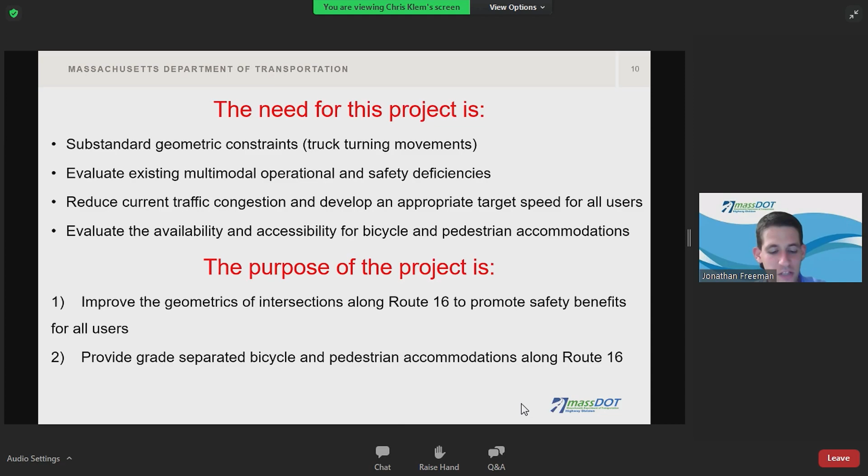This graphic shows an aerial view of the project limits outlined in red. The project limits start on Uxbridge Road, Route 16 in Mendon, just west of Taft Avenue, and continue east for 1.9 miles on Route 16 to the Hopedale town line, just east of Harrington Street.

In addition to the corridor, the following intersections and their roadway approaches are included in the project and are highlighted in orange: Route 16 and Hartford Avenue West, Route 16 and Millville Street, Route 16 and Emerson Street, Washington Street, Route 16 and Maple Street, and Route 16 and Main Street, North Avenue.

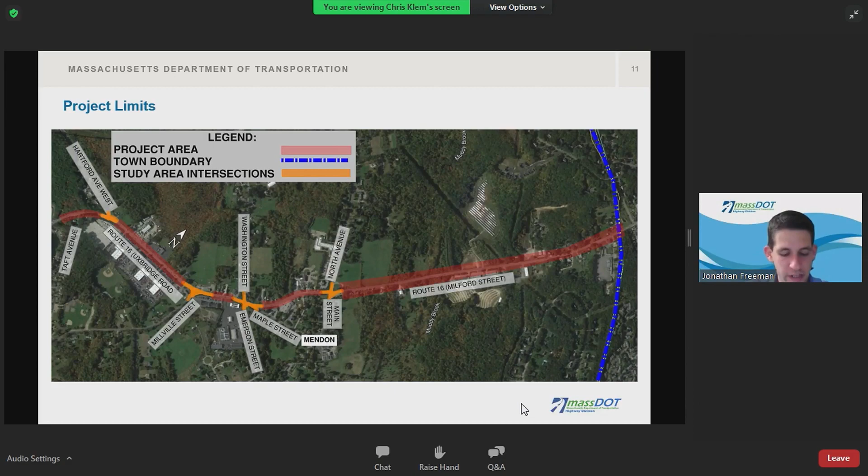Existing deficiencies along Route 16 and at the existing intersections include traffic congestion, poor and unsafe operations, and a crash rate higher than the statewide average.

In addition, existing deficiencies were also observed along the corridor, including, but not limited to, a lack of consistent pedestrian and bicycle accommodations, poor pavement conditions, unconnected sidewalks, and drainage issues. The next few slides will show existing conditions, photos of these deficiencies and others.

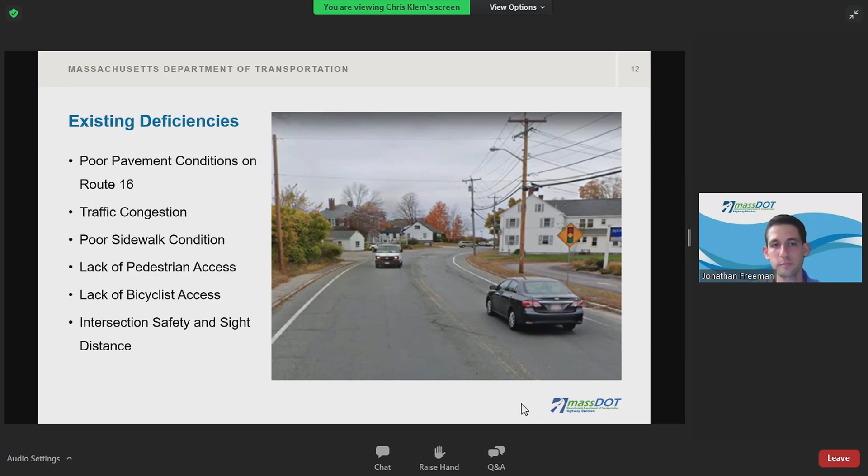Some of the deficiencies in this photo include pavement in poor condition, no bicycle accommodation, and non-compliant Americans with Disabilities Act sidewalks. Outdated signage does not provide proper retroreflectivity and advanced warning needed.

The lack of accommodations for all users throughout the corridor is seen in these photos. Due to the numerous driveways, both residential and commercial, improving access management to and from Route 16 was evaluated to improve safety for all users. This project will make the needed improvements to these existing deficiencies.

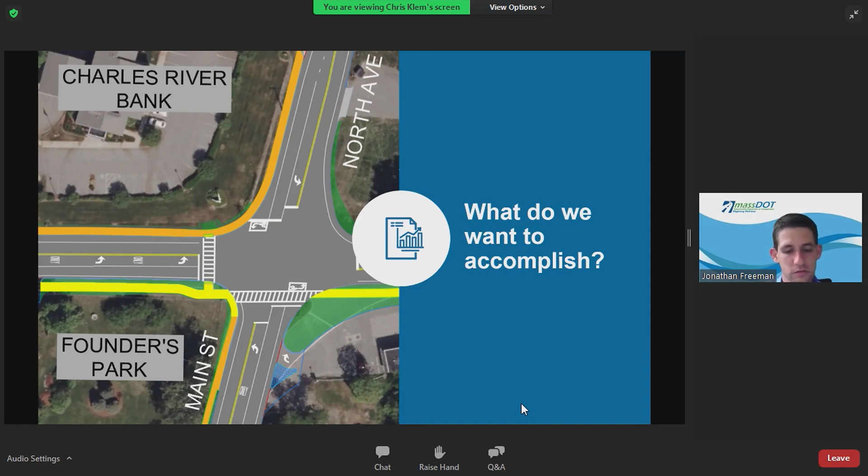Given these deficiencies, the goals of the project are quite clear. The project will improve pedestrian accommodations, add bicycle accommodations, and improve intersection safety and geometry. This project will improve safety for all modes while staying consistent with MassDOT's Healthy Transportation Policy Directive, which encourages and promotes multimodal accommodation with the long-term goal of increasing the number of trips made by walking and biking.

The project will also improve the existing roadway pavement, access management, and include stormwater improvements.

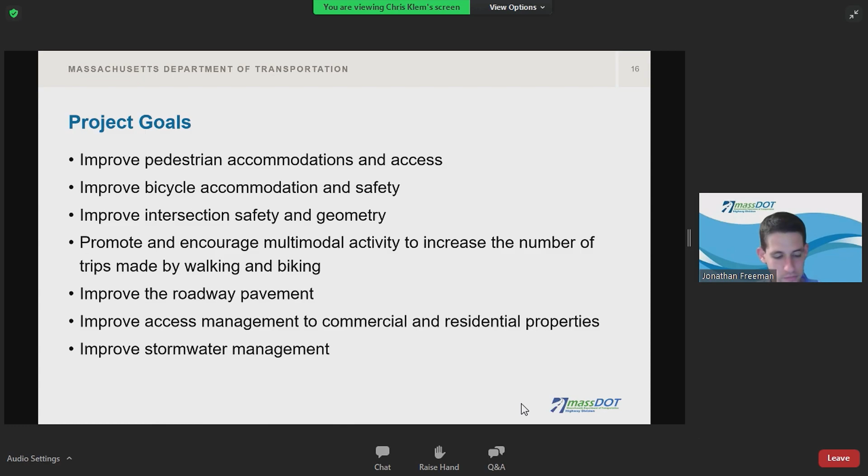Based upon these goals, two design alternatives were studied. The Route 16 corridor alternatives were reviewed for pedestrian and bicycle accommodations, looking at separate and shared accommodations through sidewalks with on-road bicycle lanes, as well as off-road shared use paths for use by both pedestrians and bicycles.

Alternative 1 shows one travel lane in each direction with a two-way left turn lane. On the left side is a continuous 7-foot wide sidewalk, and on the right side is an 8-foot wide shared use path buffered with a 4-foot landscape strip.

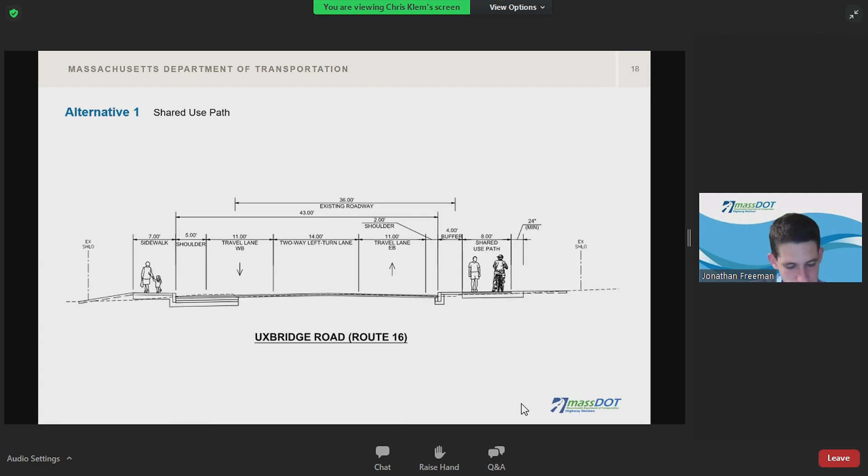Alternative 2 shows one travel lane in each direction, separated by a painted median. 5-foot buffered bike lanes are provided on the street, with two 6-foot sidewalks for pedestrians.

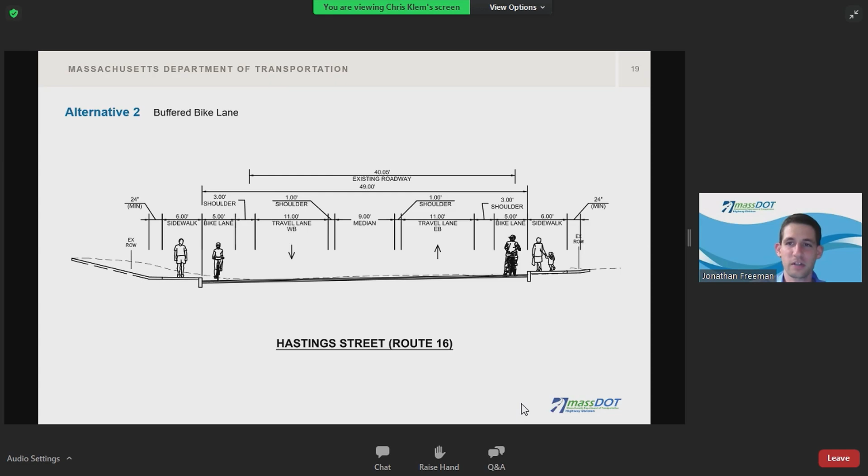Once the two alternatives were identified, detailed analysis and discussion with MassDOT, the town, and HNTB took place, and the preferred alternative was selected and is presented here tonight.

The preferred alternative, which includes an 8-foot wide shared use path on the south side and a 7-foot wide sidewalk on the north side, was selected to reduce right-of-way impacts, reduce environmental impacts, and increase safety for all users by separating the bicycle accommodations from the roadway.

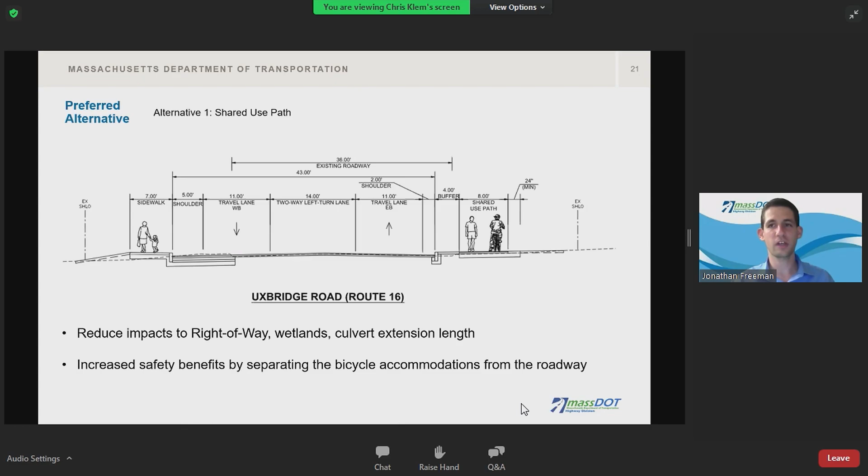Corridor-wide improvements will include new pavement, stormwater improvements, and new pavement markings and signage. Specific improvements to each of the intersections will be discussed in detail in the following slides.

In the next few slides, we will discuss the proposed changes at four intersections. These include geometric changes to accommodate WB-67 trucks, improved traffic operations and sightlines, new pavement markings and signing, ADA-compliant crossings at newly designed intersections, new traffic signals at Route 16 and Hartford Avenue West and at Route 16 and Millville Road, signal improvements at Route 16 and Main Street North Avenue, and a new mid-block crosswalk with flashing lights at the Hopedale Town Line.

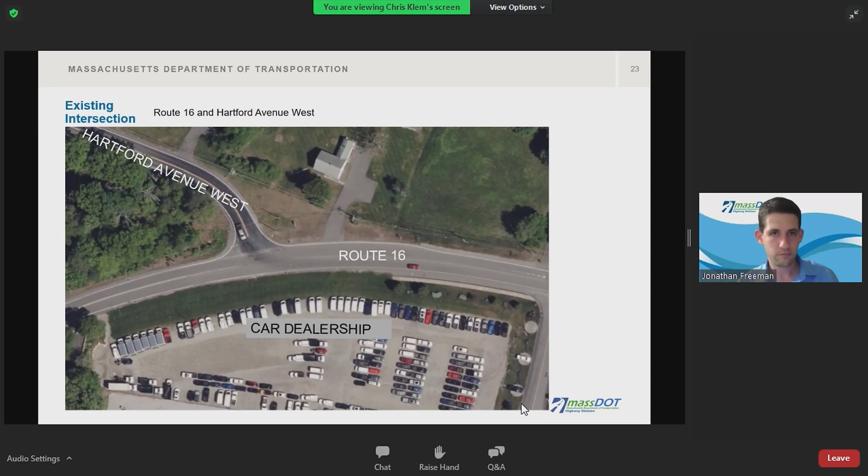This slide shows the existing intersection at Route 16 and Hartford Avenue West. This slide shows a rendering of proposed improvements, including a right turn lane, a left turn lane to Hartford Avenue West, new sidewalks, crosswalks, and a new signalized intersection. Bicycle accommodations will use the shared use path, shown on the bottom of the graphic.

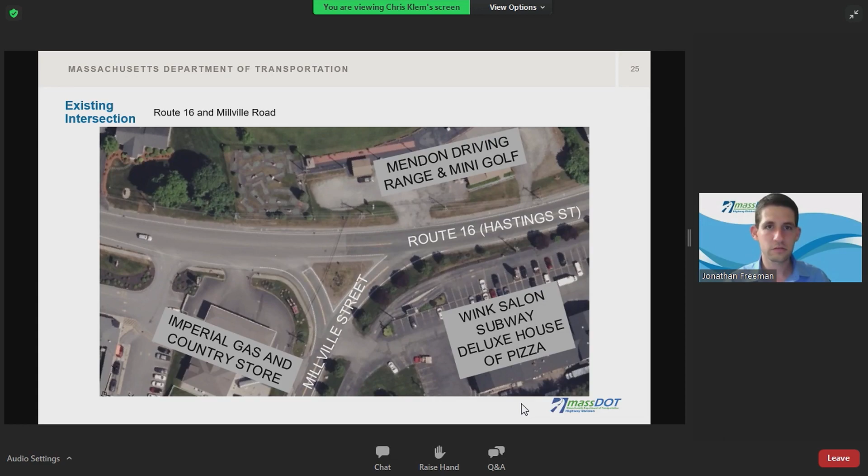This slide shows the existing intersection at Route 16 and Millville Road. This slide shows a rendering of the proposed improvements, including a two-way left turn lane on Route 16, a left turn lane to Millville Road, new sidewalks, crosswalks, and a new signalized intersection. Bicycle accommodations will use the shared use path, shown on the bottom of the graphic.

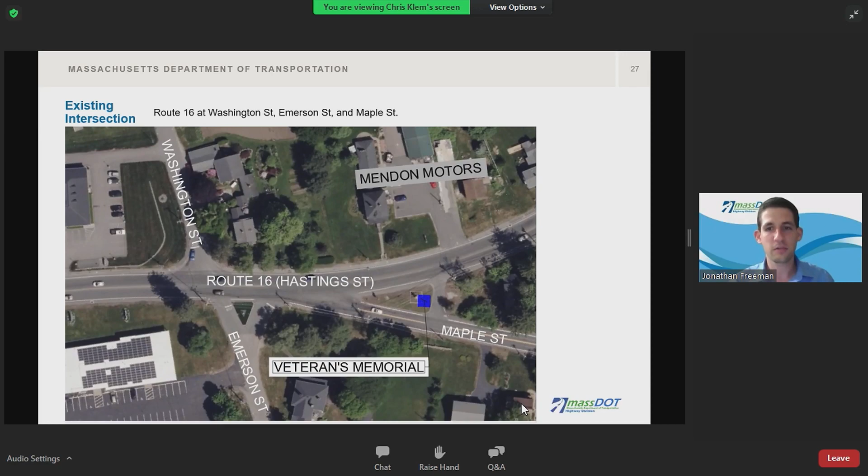This slide shows the existing intersection at Route 16 and Washington, Emerson, and Maple Streets. This slide shows a rendering of the proposed improvements, including new signalized intersections, left turn lanes at the Washington Street and Emerson Street intersection, a right turn slip lane onto Maple Street, new sidewalks, crosswalks, and bicycle accommodations using the shared use path shown on the bottom of the graphic. The Maple Street intersection has also been redesigned to be a T intersection to improve sight distance and safety.

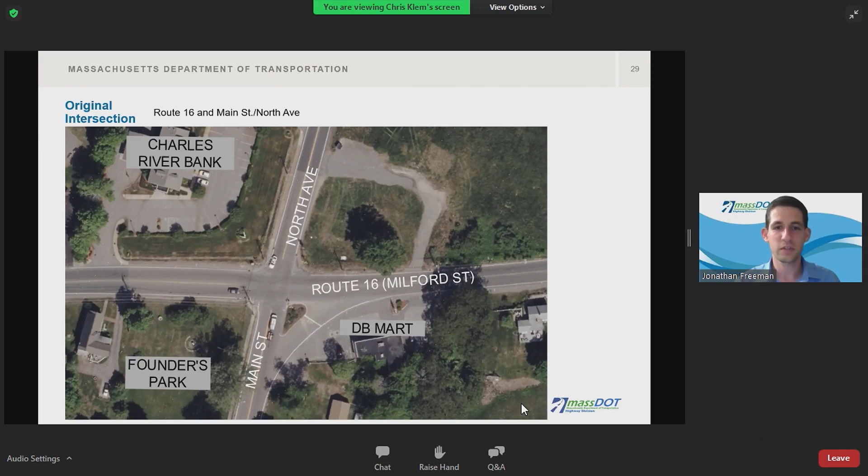This slide shows the existing intersection at Route 16 and Main Street North Avenue. This slide shows a rendering of the proposed improvements, including a left turn lane for all roadway segments, new sidewalks, crosswalks, and a new upgraded signalized intersection. Bicycle accommodations will use the shared use path, shown on the bottom of the graphic. The intersection geometry was also revised to improve the crossing distance for both pedestrians and vehicles.

Now we will discuss the right-of-way process for this project. I will turn the presentation over to Michael Ruderman.

Thank you, Jonathan. This is Michael Ruderman, and I'm here representing the Right-of-Way Bureau of MassDOT. Right-of-way is responsible for acquiring the fee, the permanent easements, or the temporary easements—all the necessary rights in the land of the public for the design, construction, and implementation of this project.

As the plans are now at what we call the 25% stage—a benchmark based upon the number of details that have been finalized and the number of details that still need to be added—we're still constructing the plot of what easements, whether temporary or permanent, or fee takings may be required. So we're still putting that together.

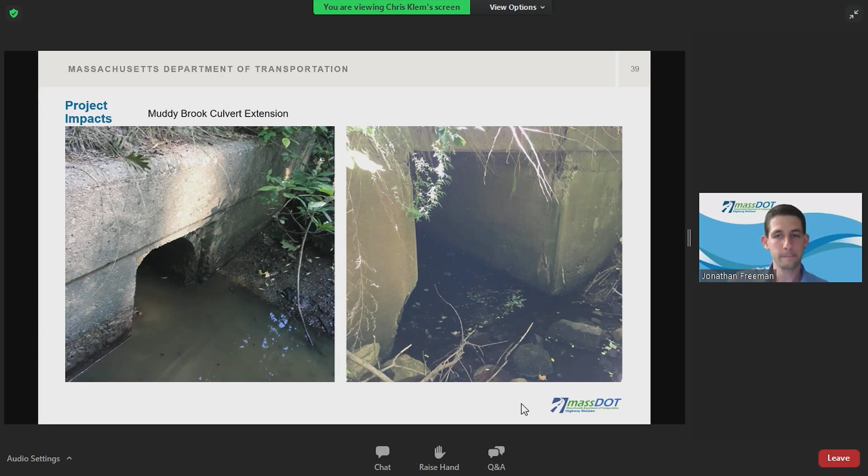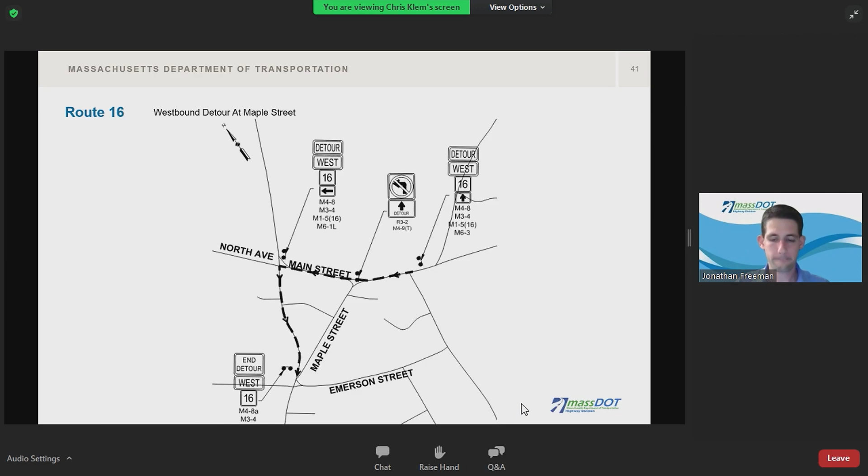Roadside work, such as sidewalk and curb installation, will take place during regular construction hours. These activities will be outside of the traveled way, and all streets in the project area will remain open to traffic throughout construction. During peak periods, a minimum of two lanes of traffic will be maintained. Roadwork within the traveled way will occur during off-peak hours when traffic volumes are lower, and there may be short-term use of alternating one-way traffic. Police details are expected to help facilitate these temporary traffic control setups.

The project strives to limit impact to abutters by always maintaining access. However, short-term impacts are likely, and the resident engineer will communicate with abutters to best coordinate when those impacts could be accommodated. Night work is not anticipated at this time. Lastly, construction of this project is anticipated to last approximately two years.

In terms of next steps on the project, after tonight we will consider any comments received and proceed with 75% design to be completed in the spring of 2023. After that, we will move into final design and work with the state right-of-way section to secure necessary right-of-way. The project is scheduled to have an estimated advertisement date for construction in the fall of 2023, with construction likely to start during the summer of 2024. Estimated cost of construction is approximately $13 million.

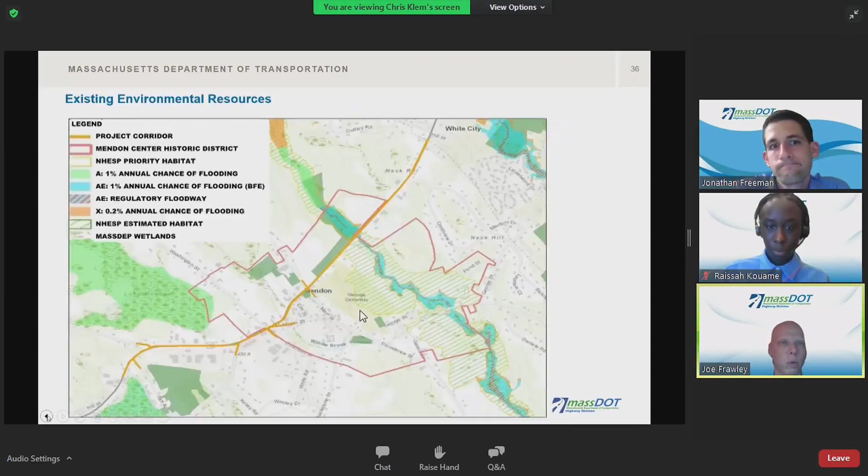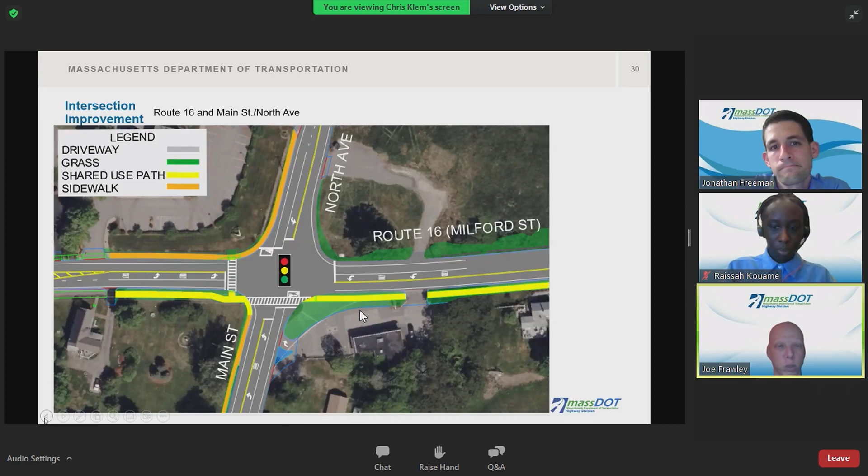So Route 16 will continue to have the right-of-way as they do today. The triangle configuration will be modified some, and there will be a stop sign for traffic looking to exit Millville Road. Yeah, we can go back a couple more slides, please. So for people wanting to turn right from Millville onto Route 16, they'll have a yield sign.

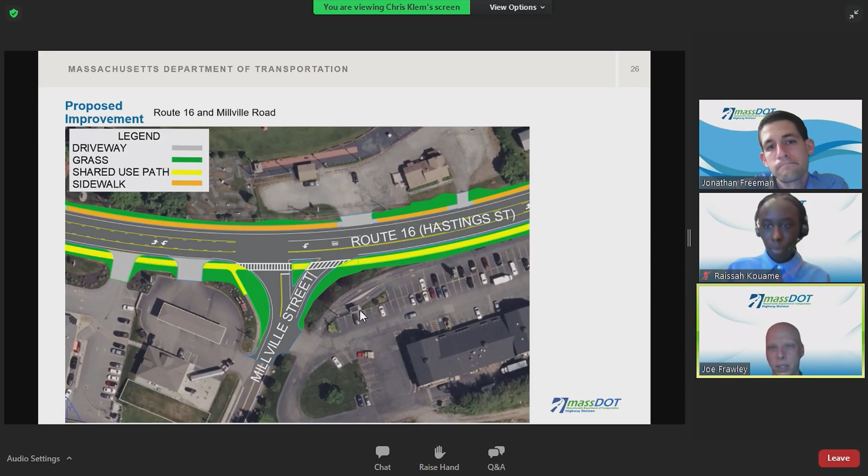At the intersection of Washington Street, Emerson, and Maple—that's the next slide or two—unfortunately that slide has a mistake on it. There is no signal proposed at the intersection of Emerson and Washington Street. However, a traffic signal is proposed at the intersection of Route 16 and Maple Street. I hope that helps clarify. Thank you for the question.

Okay, I will unmute now Dan Byer, who will allow Bill Ambrosino from the Town Hall Planning Board to speak.

All set? Yes, this is Bill Ambrosino, I'm chair of the planning board here in Mendon. And I just wanted to make a comment that I'd like to be involved going forward, if I could be notified. We have a lot of site plans going on, and I want to incorporate anything we allow into the project as far as egress and those situations. And actually, hopefully get an opportunity to speak to someone regarding the future egresses or changes that you plan on making to those.

Bill, if you could just work with our permit section, I can provide you with contact information. So any site development that you have going on within the project limits, if you can work with our permit section, who can also coordinate with HNTB and the project manager to make sure that we're aware of any improvements that are proposed along the corridor. Certainly.

I will now unmute Mike Maroli.

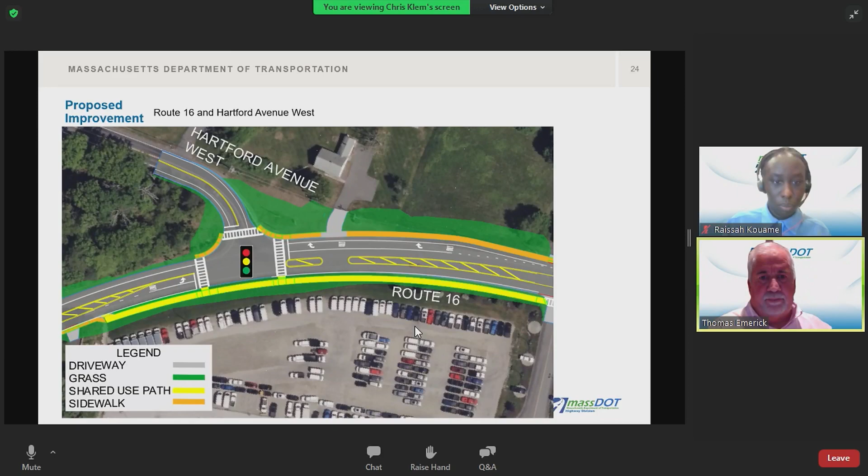It's this one right here. So Jim, as you can see on this plan, the existing driveway for that property is maintained. So if there's no development on that property prior to construction, this is how it would look when we're done. If there does become some development through our process, while we're designing the project before we go to construction, that's something that we can adapt before we go to construction.

So it would require a permit for any change in use there. That would go through our permit section. But you'd be able to maintain your existing access to the property now. And if you have something proposed for the future, if you could get that to our designer, that's something they can take a look at early on in the design to see if any changes need to be made to accommodate that.

Yeah, Tom, so if you look just east of the house where the field is, as you see the first arrow going onto the closer to the intersection, that's going to be a commercial project that I'm going to be obtaining permits for, hopefully before the project starts. I'd like to be able to get some type of a curb cut there before the house for that parcel, and also after the house on the Hartford Avenue side. I think that's more of a town permit there, but I just want to make sure that there'll be accessibility to both of those parcels of property.

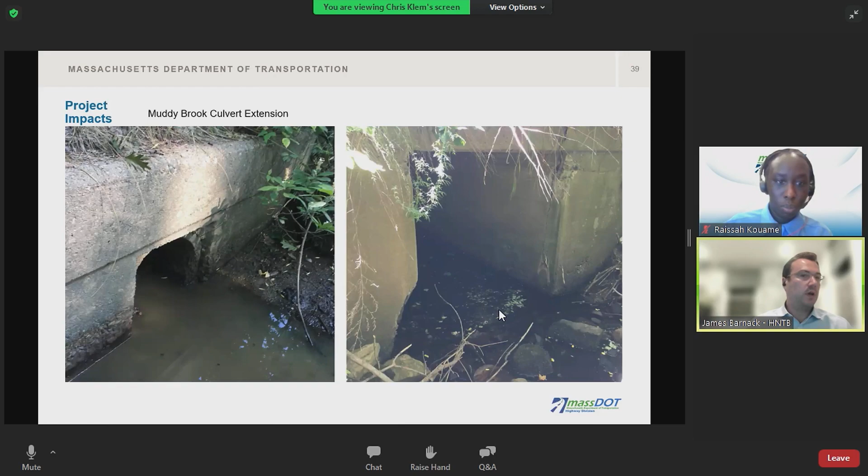Was there any other—there's a list of questions. Did I answer all of North Ave? The one at North Ave at 16, that one's coming out, right by Founders Park. James, can we have the slides brought up for that intersection so we can show it? I don't have control of that—North Ave is being removed. That's to allow for truck turning movements to accommodate a WB-67.

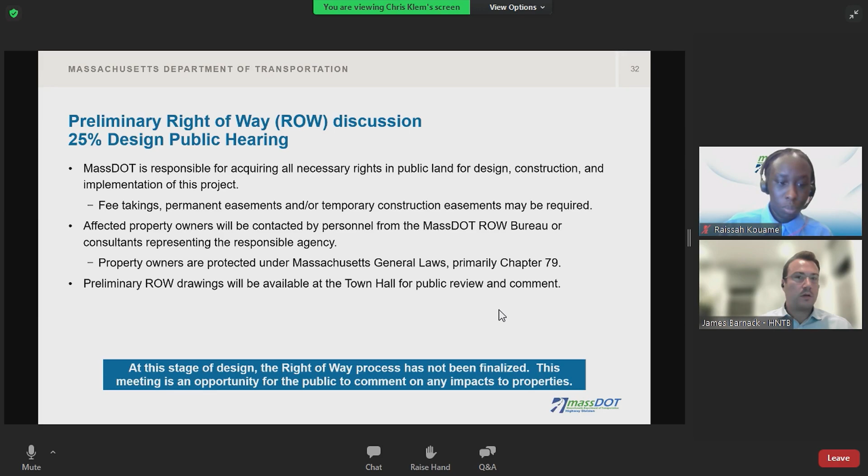North Ave should be the last colored graphic. To the right, yeah.

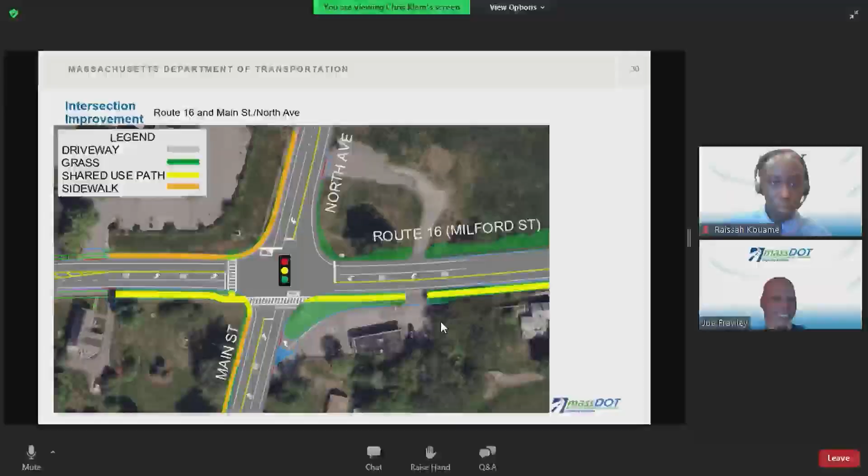We have another question from Bill Ambrosino, the town planning board chair. Yes, I just had one more quick question. Is there any further consideration for traffic circles? I kind of promote traffic circles—that's how we got into the private development of the traffic circle at Millville Road. I figure if they put one at Kelly Square in Worcester, they can put one anywhere.

Good evening. As part of the early development of the project, we looked really closely at what we could do to put roundabouts in as part of the project, because in MassDOT as a whole, and in District 3 especially, we really like roundabouts—we realize how efficient and safe they can be. Working with our designer at HNTB, we looked at it at a lot of these locations. But because of some constraints and projected traffic volumes at locations like Main Street and North Ave, and further down at Maple and Hartford Avenue West, it was very challenging to fit them in, which is why we ended up going with traffic signals.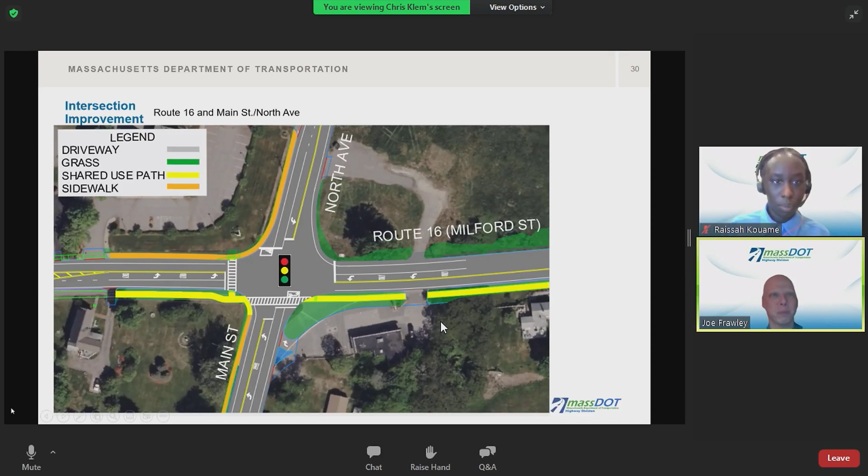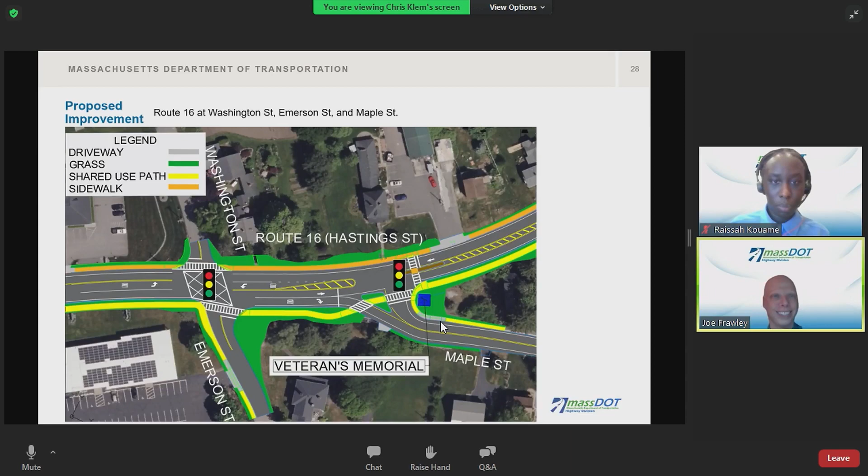I think it's great that the town has been working with the developer on the Millville Road intersection—it's a great location for a roundabout given the amount of space there. We appreciate the work the town's been doing with the developer to get them in touch with MassDOT and our designer, and we've been working toward coordinating our improvements with the private development and the potential to put a roundabout at this location. So I hope that helps answer the question, but we certainly love to find locations to fit in roundabouts where we can. Thank you.

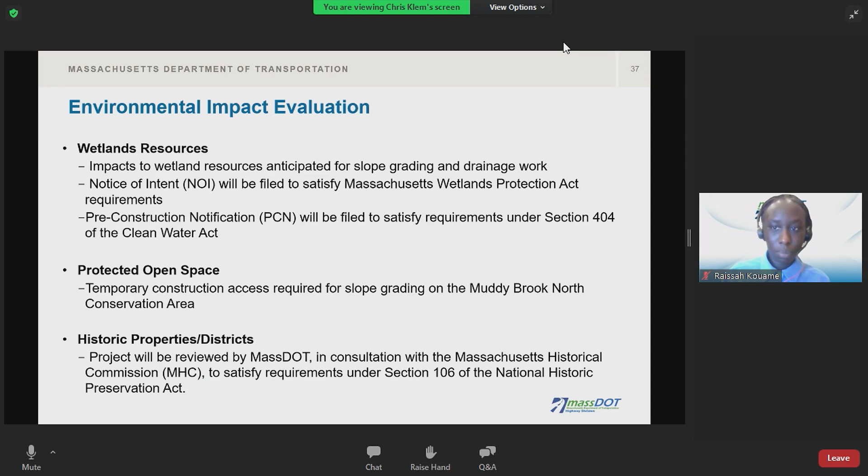When we were working on our 25% design for this project, it was before we were aware of the private development. So we looked at the existing traffic using the Route 16 Millville Road intersection, and because of the volumes counted during that initial study, we thought at the time two-way stop control was appropriate. With the nature of the proposed development, the developer has been working with MassDOT to submit information related to projected traffic associated with that development, which changes the amount of traffic that would use that intersection.